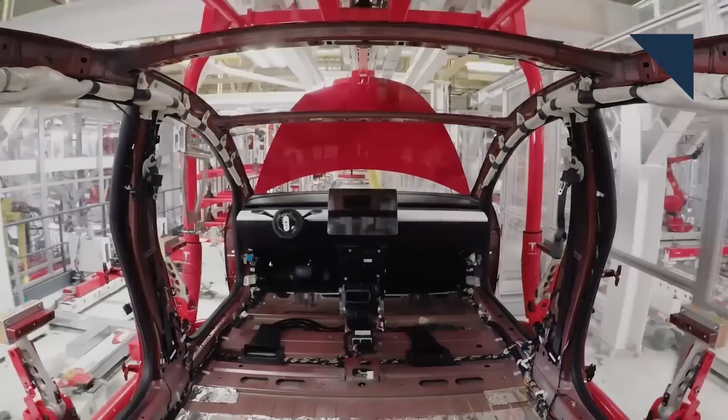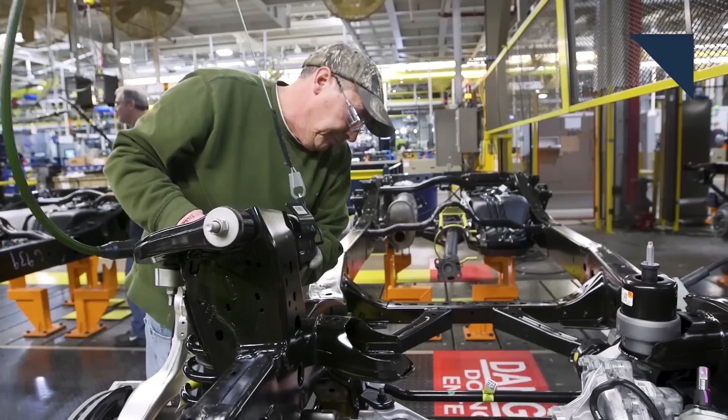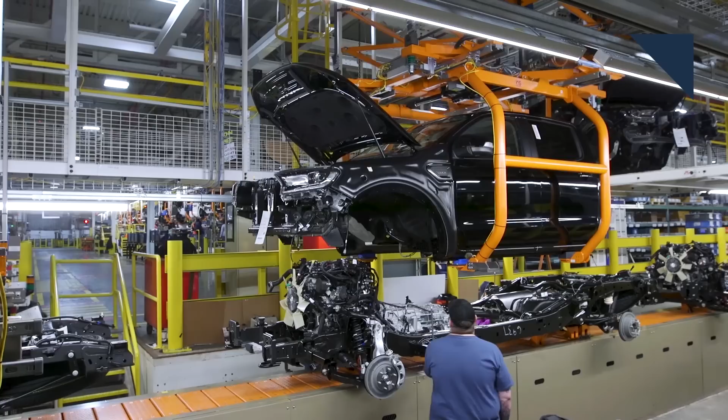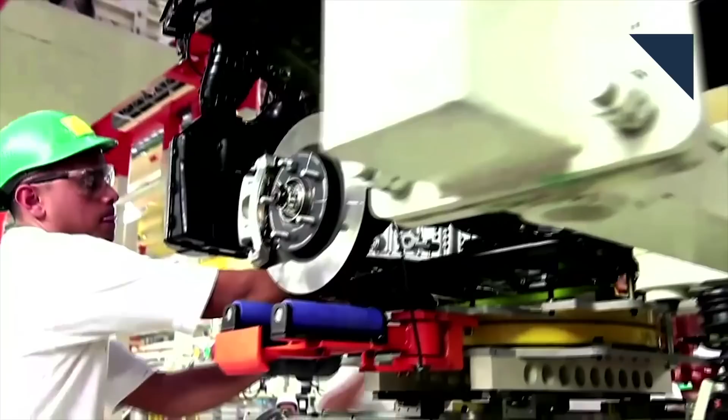The new USMCA trade agreement will cost automakers nearly $3 billion more in tariffs over the next decade, says the Congressional Budget Office. That's because to avoid tariffs, 75% of a vehicle's content must come from the US, Canada, or Mexico, up from 62.5% under NAFTA. There's also mandates to use North American steel and aluminum. On top of that, 40 to 45% of a vehicle's content must be built by workers that earn more than $16 an hour. And some vehicles made in Mexico with components mostly from Mexico and other regions may not be eligible for US tariff-free access.

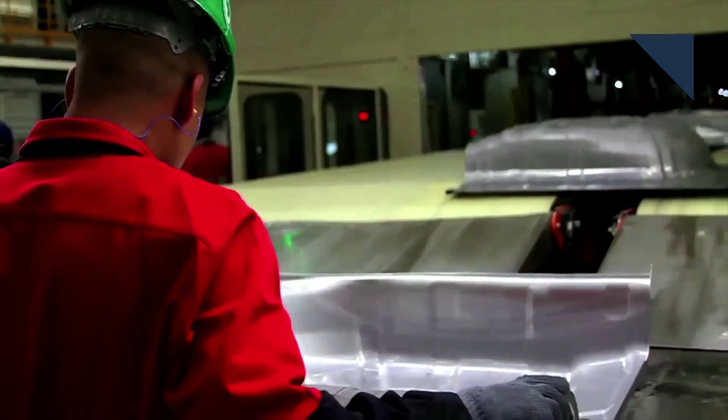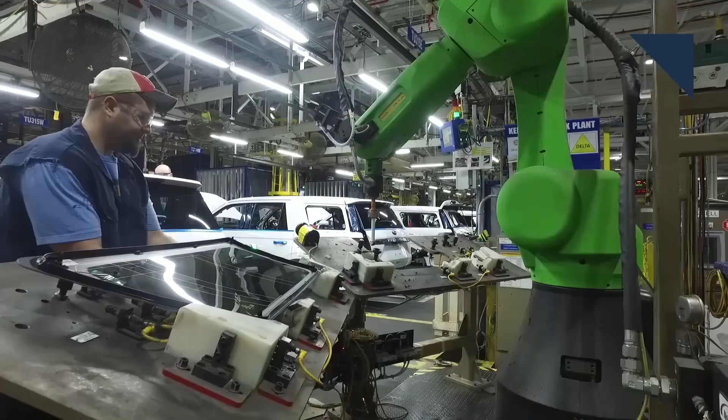Here's our Autoline insight. While tariffs might go up by $300 million a year, that's a drop in the bucket compared to the total volume of trade. The USMCA will help stop Mexican factories from importing Chinese components, doing some minor assembly, then exporting that as Mexican content. And the wage stipulation will protect U.S. jobs and could lead to higher wages in Mexico, either of which will be good for workers.

Automakers had high hopes for making bundles of money with car-sharing services. But Daimler and BMW are now pulling out of the car-sharing market in North America. Share Now, a joint venture between the two companies, said it will end operations in the U.S. and Canada due to volatility in the global mobility market, as well as costs needed to sustain operations in North America. Let us put that in plain English for you: they were losing money and saw no way to turn it around. Share Now offered services in New York, Seattle, Washington D.C., Montreal, and Vancouver, and already stopped operations in 5 other cities. So this announcement wasn't a huge shock.

Speaking of Daimler, the automaker is being hit with a $20 million fine by the National Highway Traffic Safety Administration over its handling of recalls involving 1.4 million vehicles. The agency says the company did not notify owners in a timely manner and did not submit all the reports. But Daimler may not have to pay the entire fine. It will pay $13 million over the violation, but it will only have to pay the other $7 million if it does not comply with the agreement.

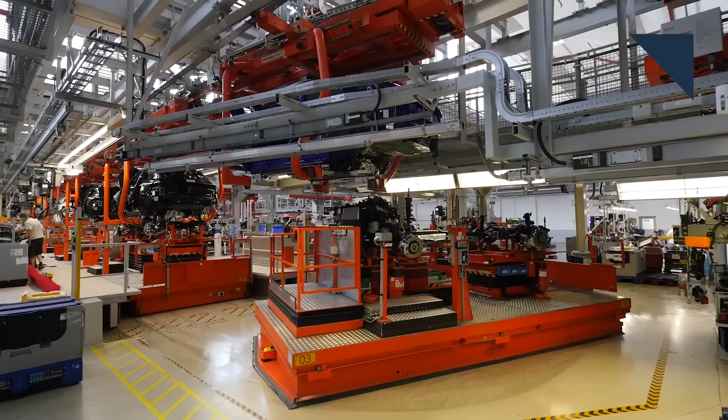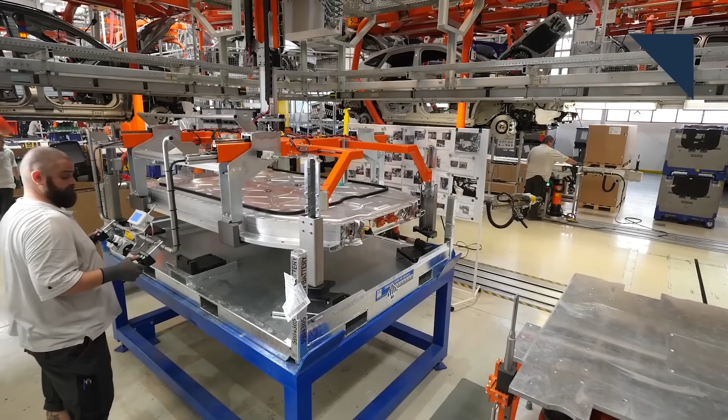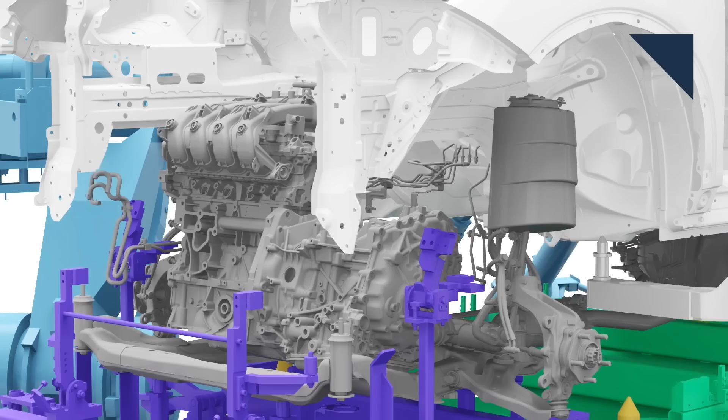Traditional automakers like Jaguar and BMW are trying to build EVs on the same assembly lines as their ICE vehicles, but they often have to use offline stations to install EV components. That's why Nissan developed a universal powertrain mounting system that can install 27 different powertrain combinations, including ICE, hybrid, and pure electric. The entire powertrain is first mounted to a special pallet that can adjust for all the different combinations. It's then placed under the vehicle it's going into. After that, the system measures the car's dimensions in real time, and robots are able to make micro adjustments to the pallet so it lines up with the vehicle. Nissan says the universal powertrain mounting system will make it easier to offer customers a wider variety of powertrain options.

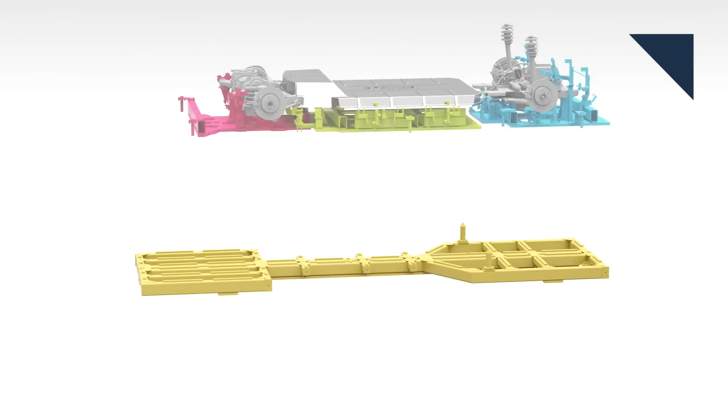Here's our Autoline insight. Automakers who dedicate assembly plants to making only EVs can remove 20 to 25% of the labor content. That's why GM will dedicate its Hamtramck plant in Detroit to making only EVs, and why Ford's plant in Cuautitlán, Mexico, will only make Mach-E's.

School buses in the state of Virginia are getting a whole lot greener. The state purchased 50 electric buses from Thomas Built Buses, a subsidiary of Daimler Trucks, as part of the initial phase of a bus replacement program.

The buses are equipped with a total of 220 kilowatt hours of battery capacity and have a range of up to 134 miles. We think drivers and students alike will appreciate not getting coal-rolled as the buses pull away from the bus stop.

Mercedes introduced an all-electric version of the Sprinter. Called the e-Sprinter, it's initially being offered as a panel van and has the same maximum loading capacity as a Sprinter powered by a combustion engine.

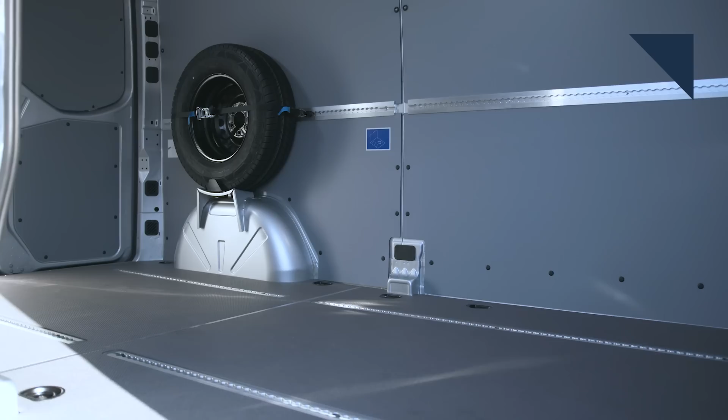The e-Sprinter features an 85 kilowatt electric motor and has two battery options. A 47 kilowatt hour battery provides nearly 170 kilometers, or about 104 miles of range, and a 35 kilowatt hour battery provides 115 kilometers, or 71 miles of range.

Mercedes did not announce the price, but we imagine it could be quite expensive. But with the number of cities around the world getting ready to ban vehicles with combustion engines, the e-Sprinter could find some willing customers.